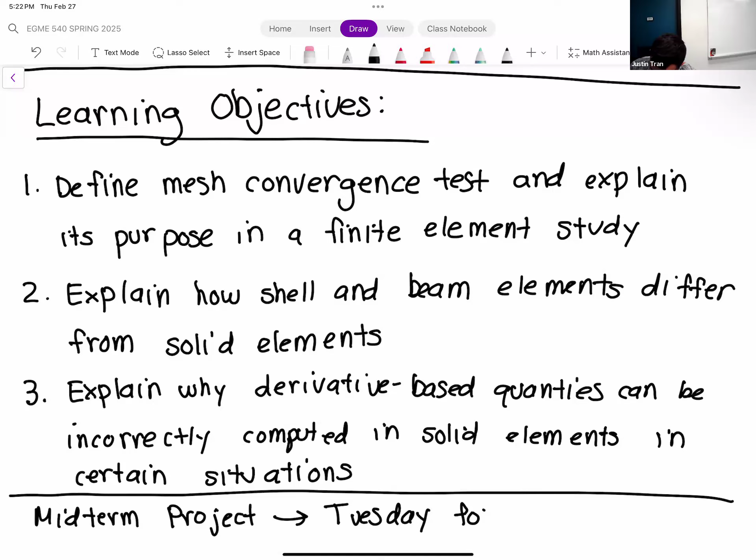Are you good? Are you done? Oh, good, thank you. I was supposed to drive my friend to the airport. He showed up at my house, and at 7 o'clock he called me like, oh my God, I gotta take you. But I did not go to sleep at a time last night that was conducive to taking your friend to the airport at 7 o'clock.

Where? Ontario. Okay, I live pretty close to Ontario, so.

Yeah, I was trying to get it done by today, but things came up yesterday. I'll get it done, and Tuesday we'll talk about it. It's not due Tuesday, so we'll talk about it Tuesday. I pushed the due date back over the weekend.

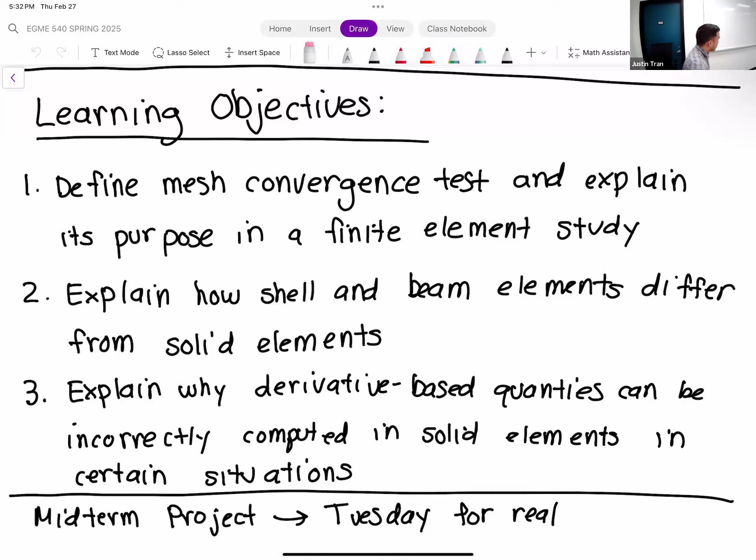All right, any questions I can answer before we get started for today? Okay, good. All right, so let's go ahead and get started. We're going to start today with the discussion of the mesh convergence test.

So we spent the last couple of weeks talking all about the different elements, right? Going over the pros and cons of the different shapes—tetrahedrons, hexahedrons, triangles, quadrilaterals—looking at differences in their shape functions, as well as linear and quadratic. All that is really good, but ultimately all of this background information leads to: what is the best kind of mesh? What is the best mesh we can use to get the best results?

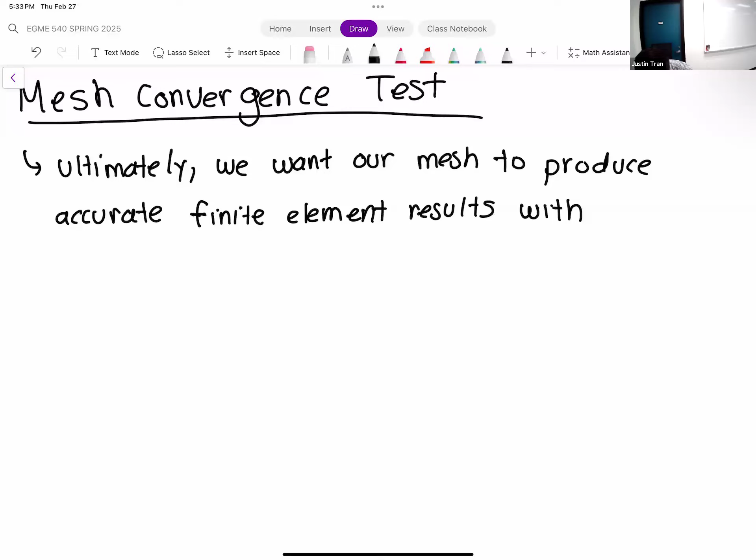So basically, you want to refine your elements enough, use just enough element order for your results to be accurate and reliable. You can go more than this, of course, but then you use excess elements and you're taking up extra resources, which in the finite element world is usually not the end of the world, but you want to reduce that if you can.

Okay, so let's remind ourselves briefly of all the levers we have to turn, or the different ways that we can tune our mesh to get these accurate results.

So most of the ways that we can tune our mesh have to do with changing our element settings—the element shape and order. We spent a great deal of time talking about those two factors and how they affect our results. But most importantly is the element size. All three of these factors contribute to how accurate your results are going to be and how costly or time-consuming the simulation is going to take.

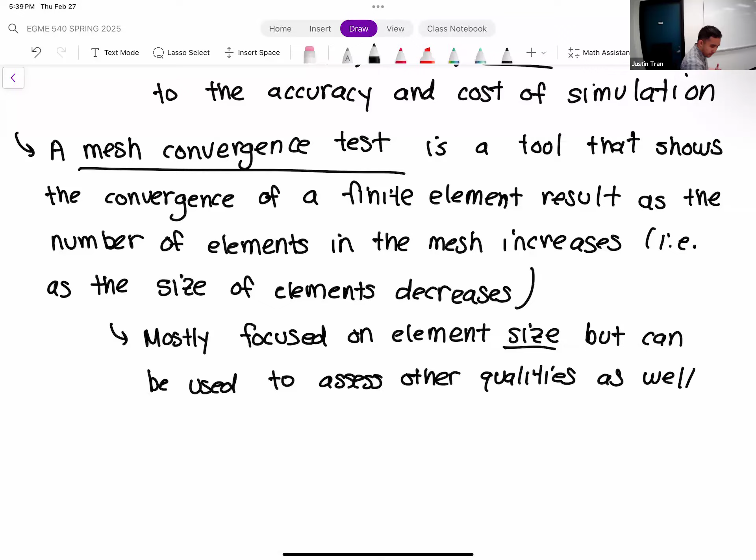Okay, so to show you a mesh convergence test, I think the easiest way is just to show you what it typically is. A mesh convergence test is typically shown as a line graph. So usually what you're going to see is a graph that looks like this.

This is something that's almost always presented in a lot of finite element studies. Maybe not the graph, but usually it's mentioned somewhere that a mesh convergence test was performed. On the horizontal axis of this graph, typically what's shown is the number of elements in the mesh.

And then on the vertical axis, you have some result - stress, strain, or deformation, something like that. So the vertical axis is some result of interest.

So typically for a mesh convergence test, in order to run it and show this, you need to run multiple simulations on the same object with the same boundary conditions. So the data points on the mesh convergence test are produced by running the same simulation, but successively refining the mesh.

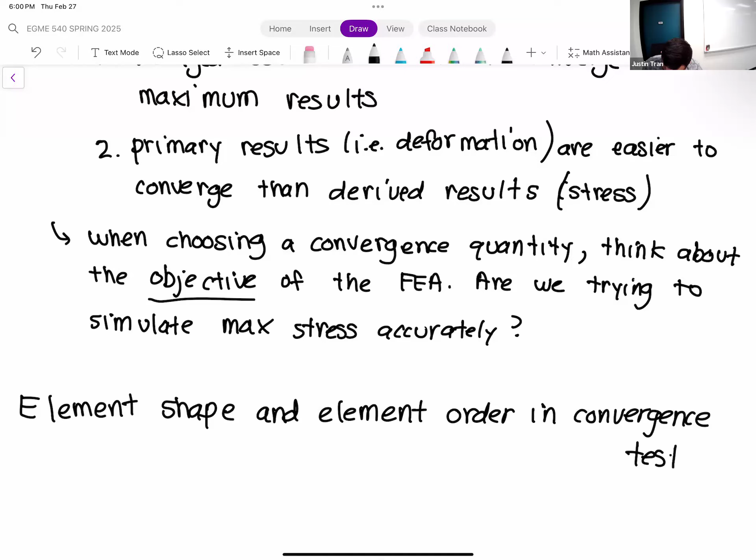Because those are going to affect the convergence as well, since we've already discussed that those things affect the accuracy of your finite element simulation. We've mostly just been discussing one axis of mesh change, which is just the element size, but really there are multiple axes. So how are you going to factor in those element orders and shapes? Well, the way that's typically displayed in practice is that you show multiple mesh convergence tests for different meshing techniques.

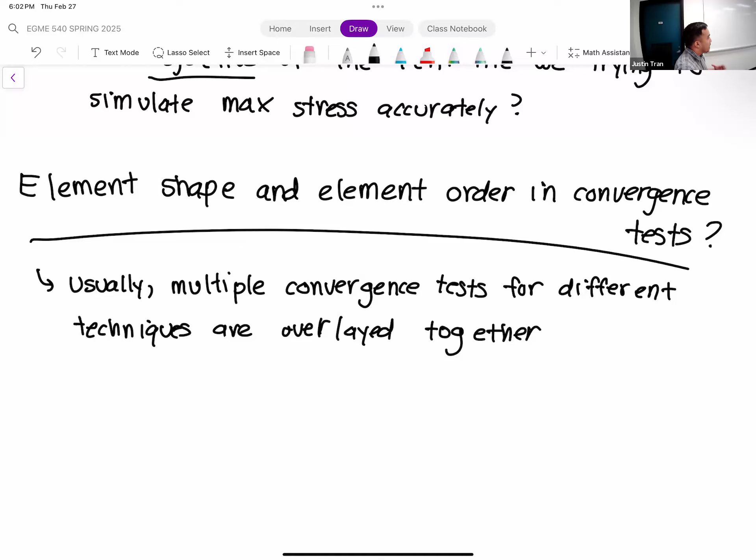So if you want to make a comparison between linear elements and quadratic elements for your finite element mesh, usually you're going to show the mesh convergence studies for both of those on the same plot. And usually what should happen is that your quadratic element should converge faster than your linear.

For example, let's say we did a mesh convergence test. Down here will be number of elements, and on the vertical axis, let's say we're converging on average stress. Let's say you ran the simulation with linear elements. So with linear elements, maybe your convergence plot looks something like this. You do reach convergence, so you can see that we've converged, but maybe you do so with a high number of elements or a fairly small mesh size. If we do the same test, keeping boundary conditions and everything else the same, but reran it with quadratic elements, your convergence plot may look something like this.

So here we've used the mesh convergence plot to show a comparison between linear and quadratic. This is typically what you should see: with quadratic elements, you should converge faster. In other words, you can get numerically accurate results, or minimize numerical errors, with fewer quadratic elements than you can with linear elements.

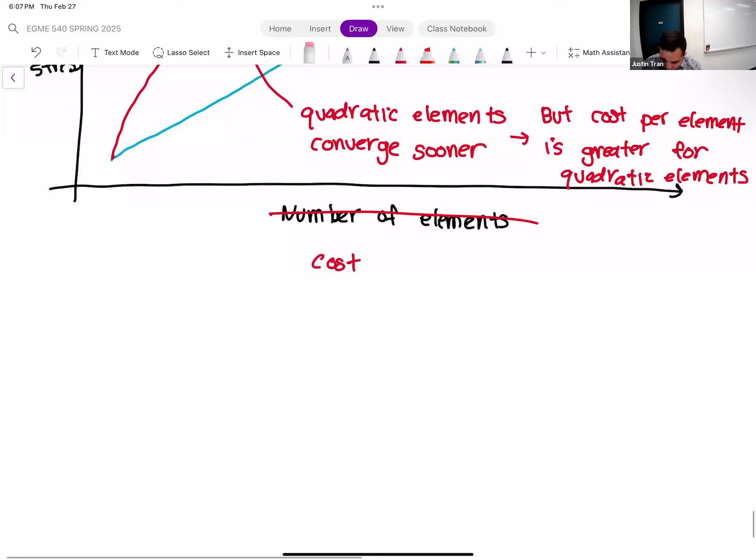Okay, good. Actually, speaking of that, another way you might see these mesh convergence tests displayed, instead of number of elements, is as the element size.

I don't particularly like this form of the mesh convergence plot because you kind of have to read it backwards. Generally, mathematically in other math classes, when you see convergence, it usually goes to the right. But with element size, you have to look at it in reverse, because you're converging as the element size gets smaller. So it usually looks something like this—even weird for me to draw with my right hand. With element size, you get convergence to the left, okay, which there's nothing wrong with. It shows you the exact same information, it's just that for me it's kind of weird to read it this way.

Certain people, certain papers will prefer this format. So if you're looking in the literature at finite element studies and the mesh convergence plot seems backwards, look and see what's on the horizontal axis—oftentimes they'll use element size. But personally, I prefer the other way. If you guys in your reports and projects do it this way, I'm not going to mark you down. I have my preference, but this is equally as valid, so do whatever feels more comfortable to you.

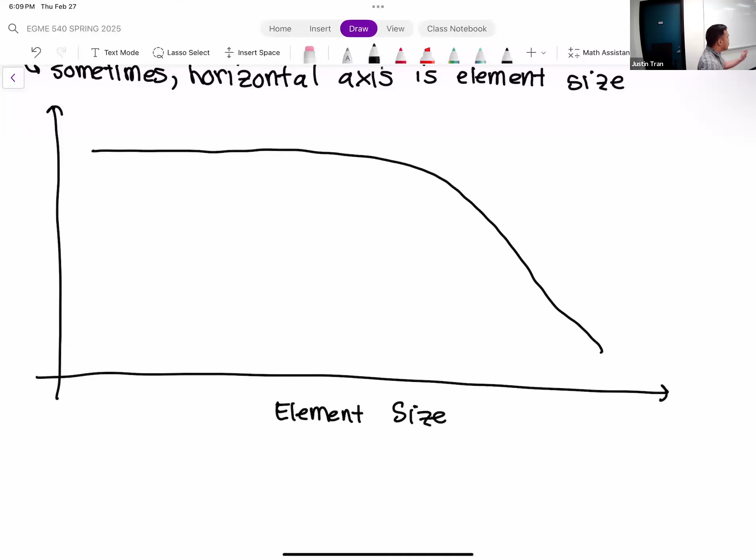I think people like this one because the element size is something you directly input. When specifying your mesh, the element size is what you directly put into ANSYS itself—you don't really have direct control over the number of elements, that just kind of results based on the size of the elements you choose. So element size is a more direct input: I put this size, and this is the result. Anyway, that's what I think the logic is.

Okay, all right, so that's mesh convergence tests, a very important part of specifying your mesh settings, and kind of a core thing that we're going to do.

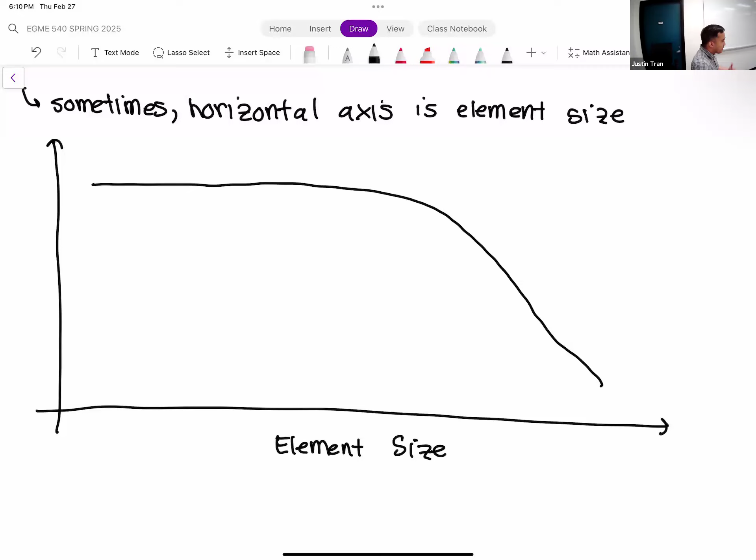All right, so for the rest of class today, we're going to start to talk about some of the more specialized features within ANSYS—features and things that you may not use in every single simulation, but can be very useful in certain situations. Keeping on this theme of meshing and elements, we're going to talk first about some specialized element types called shell and beam.

So in a nutshell, shell and beam elements are specialized element types within ANSYS that you can use for certain situations for more accurate results.

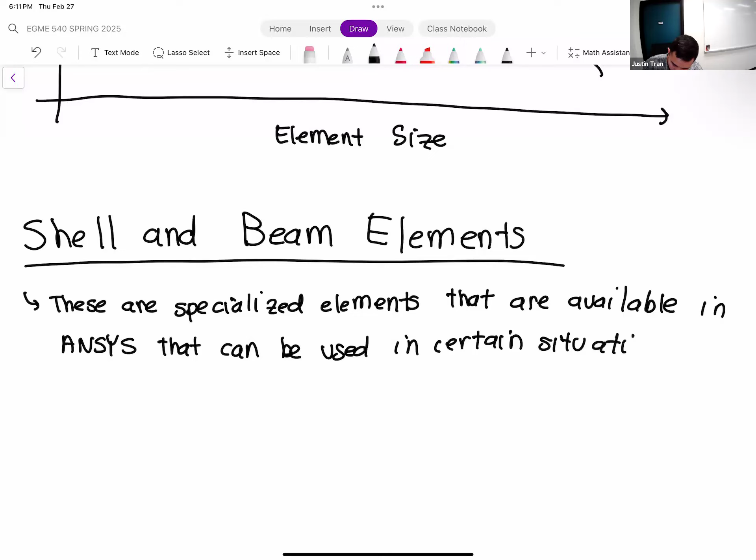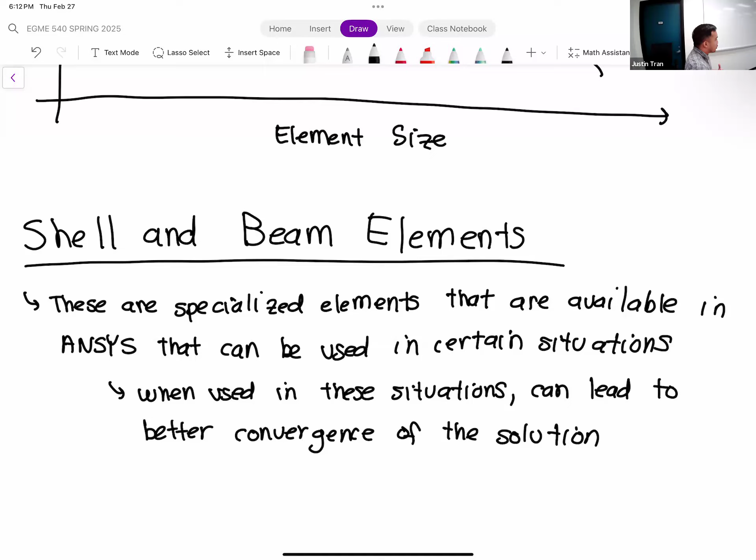We're going to talk about the situations where you would want to use shell and beam elements, as well as their benefits. The main benefit is that for these situations, they often lead to much better convergence of the solution. You're going to have much faster convergence with a smaller number of elements using these special element types.

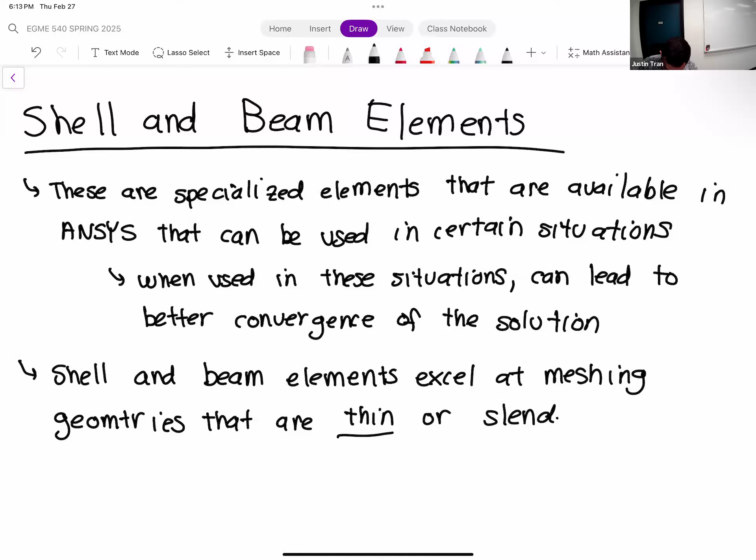So what are the situations where you would want to use shell and beam elements? You want to use these elements when your geometry exhibits certain features. In particular, shell and beam elements excel in meshing geometries that are thin or slender. The more exact definition is when you have a geometry where at least one dimension is much smaller than the others, that's usually a good indication you want to use shell or beam.

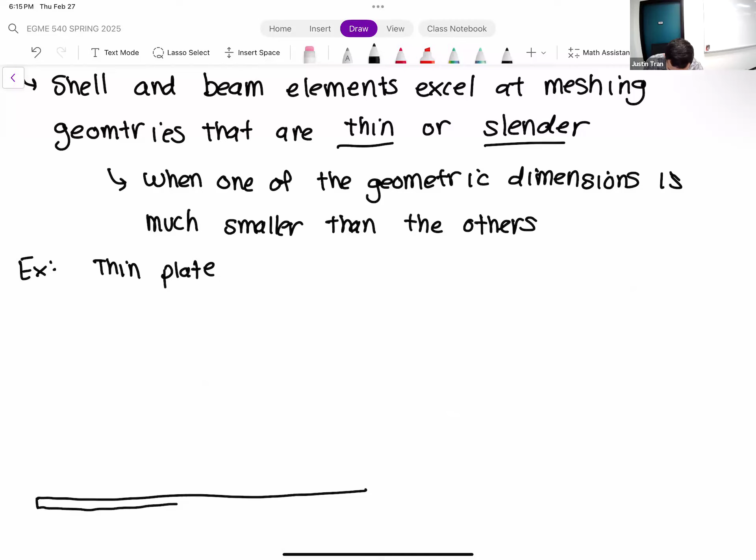Let me give you a couple examples. The most quintessential example for shell elements are very thin plate-like geometries. Geometry that may look something like this - very long in 2 dimensions, but very small in the other.

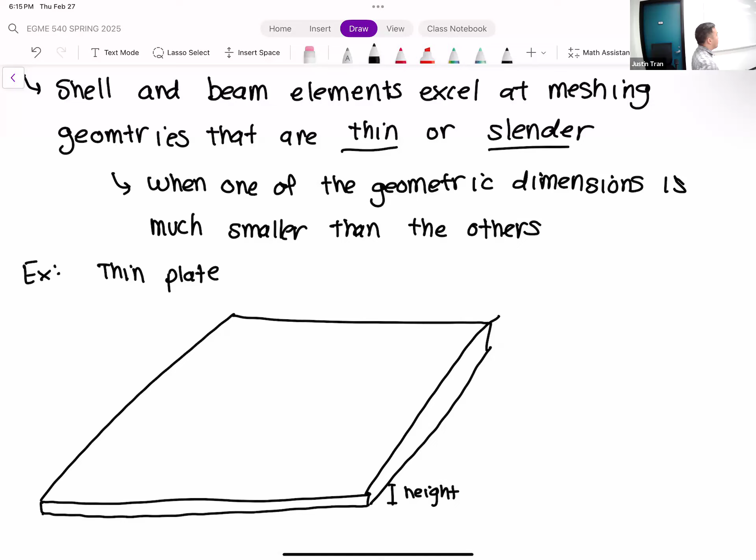The plate's supposed to have a uniform thickness, just ignore my poor drawings. In this case, the height of the plate is much smaller than the length and the width of the plate. So this would be a great chance to use shell elements.

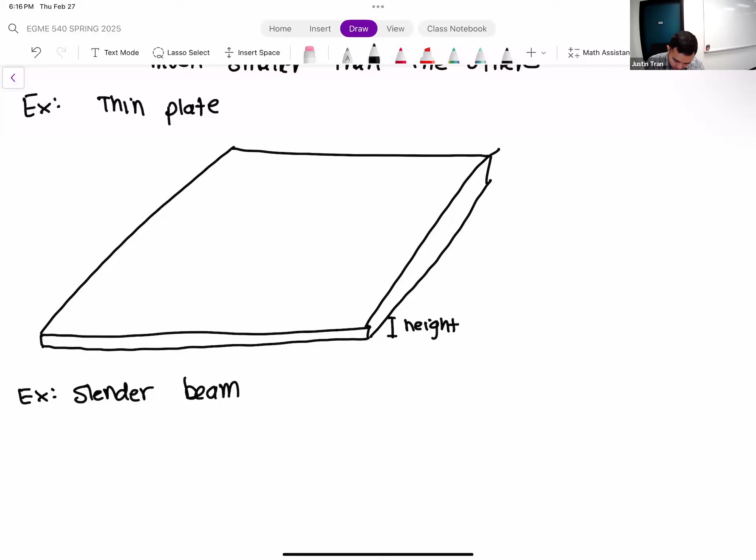This is also the quintessential situation to use a beam element for a beam-like geometry. Let's say that you have a geometry with a square cross section, very, very long like this. That would be the perfect opportunity to replace this with a beam.

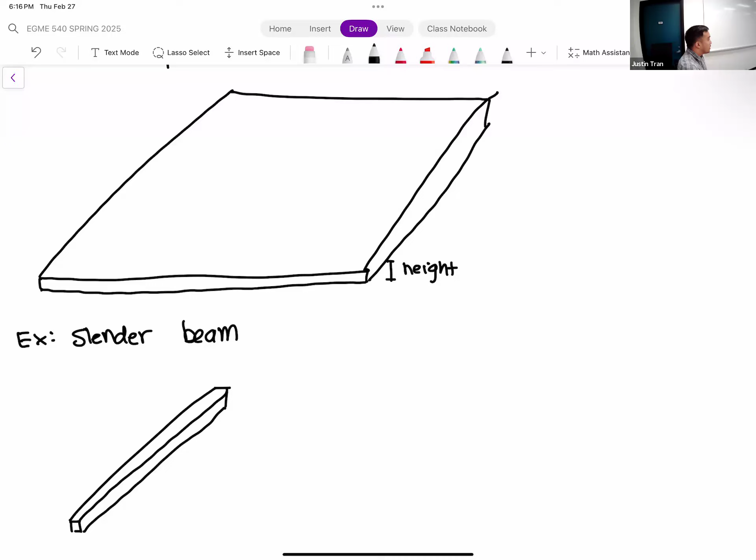If you notice from these two examples, these are objects that are technically three-dimensional, right? They should be three-dimensional, despite how I drew them. But for most cases, if you were to analyze this in practice, you would consider them either a 2D or 1D scenario. This thin plate is essentially a 2D scenario, where this slender beam is essentially a 1D scenario - at least intuitively, we think of it that way.

And so it makes sense to use elements that match up with the geometry. Instead of using a fully three-dimensional element, we should use two-dimensional elements for thin plates. Instead of fully three-dimensional hexahedrons or tetrahedrons for a slender beam, what if we replace it with one-dimensional elements? That's going to save us a lot of cost, and it's going to save us a lot of headaches with convergence.

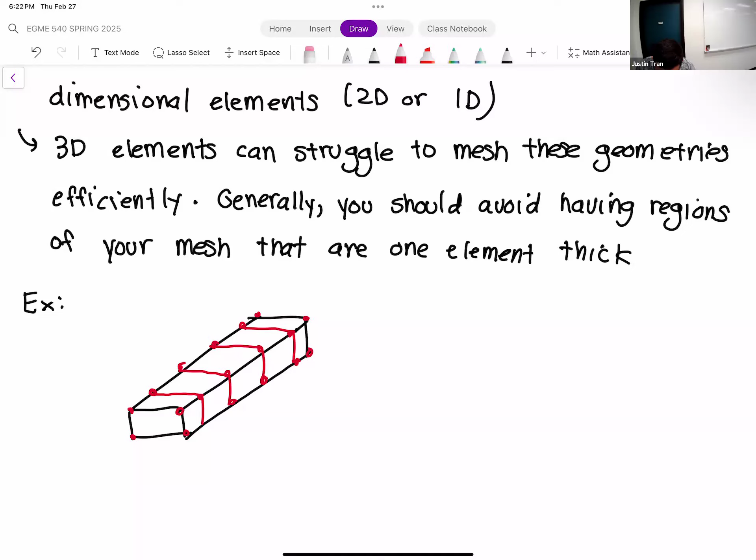All right, so this would be a situation where we only have one element through the thickness. If we travel from the top of this structure to the bottom, from point A to point B, we only cross through one element.

That's what I mean when your geometry or your mesh is only one element thick. Now this is challenging because there are no interior nodes, and so all the nodes for these meshes exist on the boundaries of that geometry. For these types of geometries, and for finite elements in general, you always want to have a healthy amount of interior nodes.

You want a healthy amount of interior nodes when you are computing your solution. And when your geometry is just one element thick, you virtually have no interior nodes.

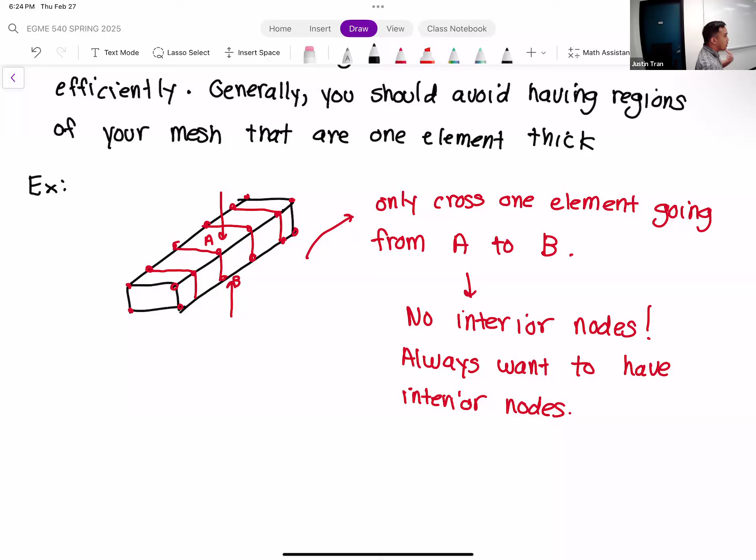The reason you want interior nodes is that a lot of your quantities are computed based on derivatives. I'm not just talking about the stresses and strains of your results, but even in solving the differential equations, the governing equations of the FEA, you're going to have to take derivatives of quantities at some point as well.

If you only have exterior nodes in your simulation, then you're basically not getting any information from the interior of your geometry. And a lot of times, especially for structural simulations, you need that information from the interior in order to correctly compute things like deformations and stress.

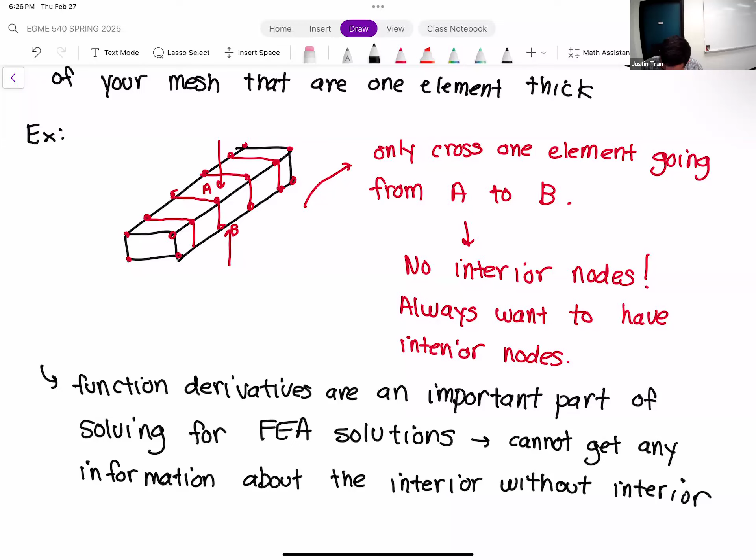So if you're going to be meshing these geometries with solid elements, hexahedrons or tetrahedrons, you want to make sure there is some indication, at least from the outside—it's very hard to look at your mesh from the inside, I do it, but at least from the outside there should be some indication that you do have interior nodes in the geometry if you want an accurate result.

Another reason interior nodes are important is because interior nodes are not acted upon directly by the boundary conditions.

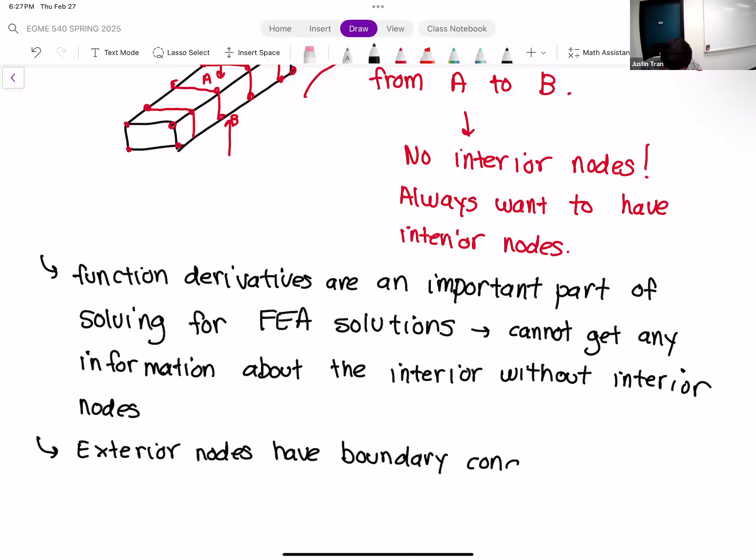Every single exterior node in a finite element simulation has some boundary condition applied to it. Now, granted, most of these boundary conditions are the zero stress boundary conditions we talked about before, which have a very minimal or negligible effect on the solution. But there are a lot of exterior nodes where you have forces or constraints applied, and those are going to strongly affect the solution and behavior as well.

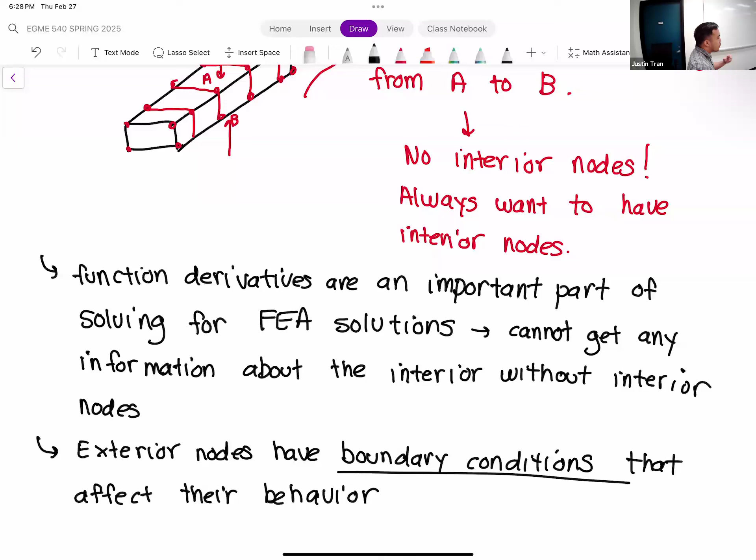You don't want those boundary conditions to be the sole determinant of things like stress and deformation in those areas. So having interior nodes hedges against situations where you don't have accurate behavior that's not just directly specified by the boundary conditions.

Because if you don't have enough interior nodes, you run the risk of your result being directly specified—you're directly specifying what the solution is, and you're not letting it come about naturally from solving these equations.

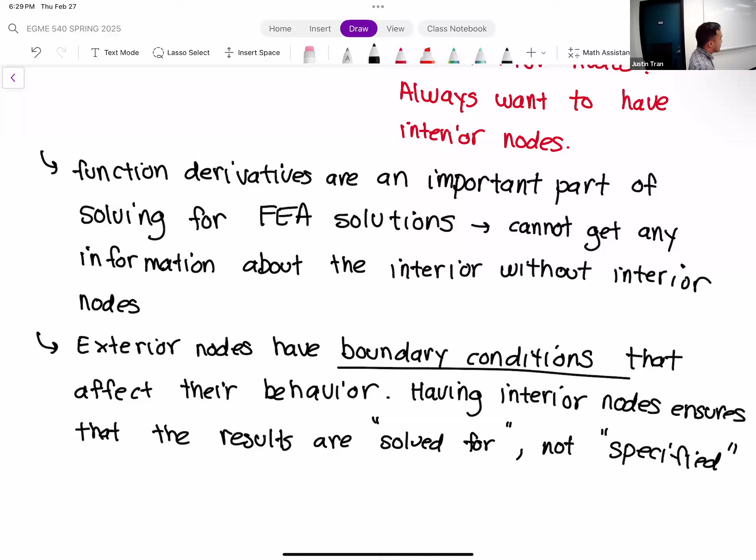There are other reasons too, especially in other domains like fluid mechanics. You want to have interior nodes there as well. Without interior nodes, you are not going to get a solution at all, because everything is just going to be a no slip boundary condition. There are other reasons, but I'd say these are the most important.

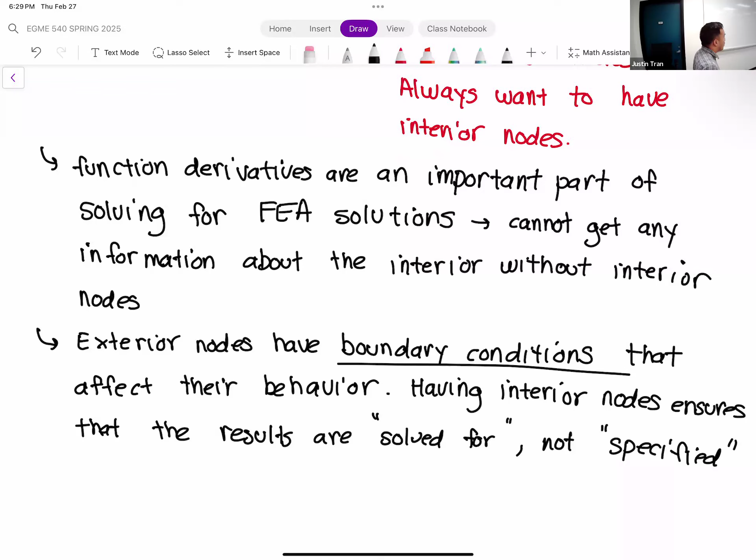All right, any questions on this so far?

So when you have a thin or slender geometry, it can often be a struggle to get interior nodes using solid elements without exponentially raising the cost.

I should define this—I've been saying it the whole time. When I say solid elements, I mean our traditional elements that we've talked about before: things like tetrahedrons or hexahedrons. These are our 3D elements. I apologize, I've been using that term all day today without properly defining it.

So the challenge with using solid elements in these thin and slender geometries is that you often need to put an inordinate amount of elements in order to get a proper amount of interior nodes.

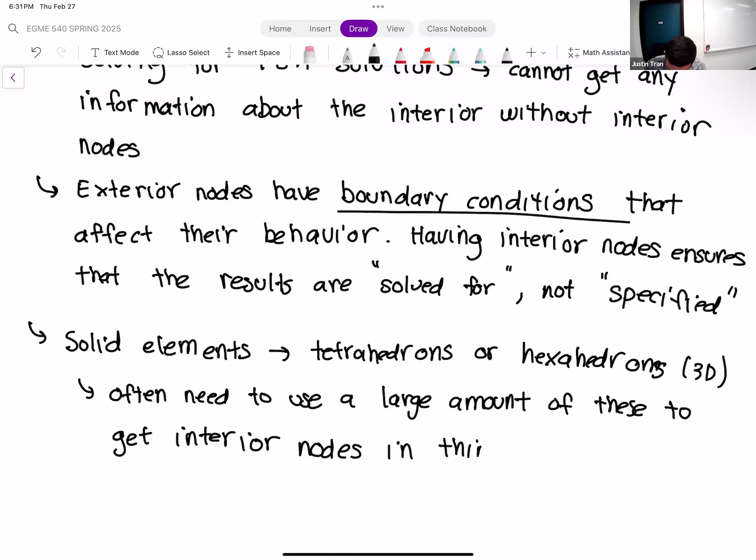Oftentimes you end up with the mesh for just a very simple plate, you may get a mesh that is 2-3 million elements, which kind of seems like overkill.

The challenge is that when you specify a mesh size for solid elements, that mesh size is applied for every edge of that element itself. It's very hard to intentionally create skewed elements. Let me show you an example with hexahedrons.

Let's say we have a very thin plate. I'm going to blow it up for a second to illustrate. Let's say we want to mesh this so that we get at least 3 elements through the thickness. 3 elements is pretty reasonable. So to get 3 elements, we have to split this in 3 - 1, 2, 3. Our elements need to be at least this size.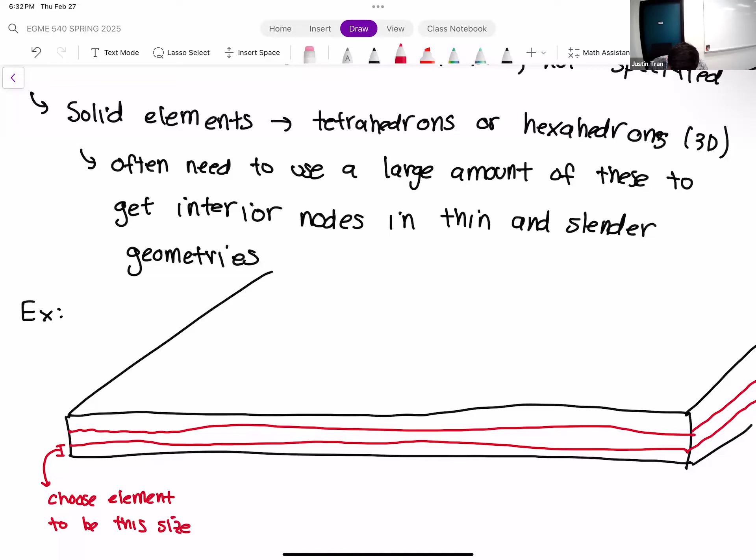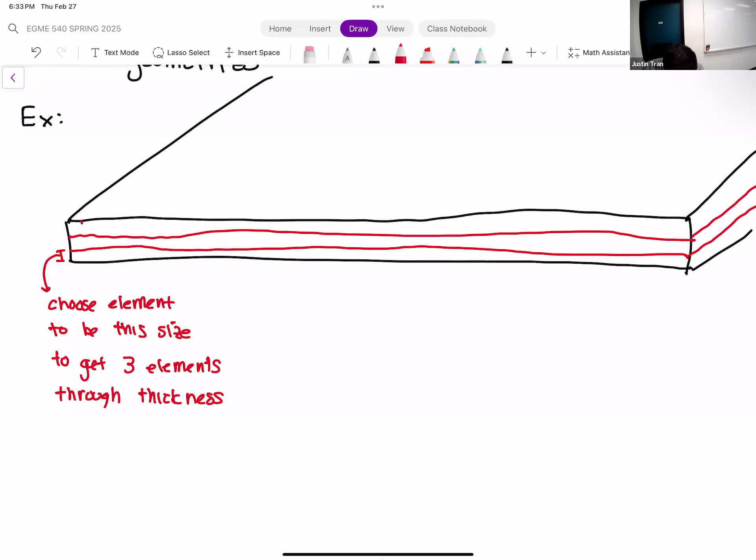So the size of the elements we choose has to be this size, maybe 2 millimeters or something like that. The problem is that when you apply that size, it applies that size to every side of the element, because elements generally like to be equal - they like to have the same length of edge on every single side. So if you choose an element of that size, you end up with a mesh that may look like this.

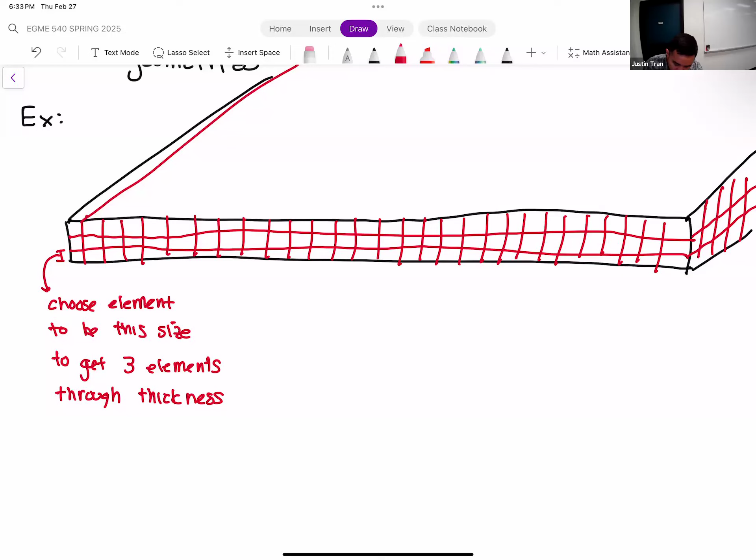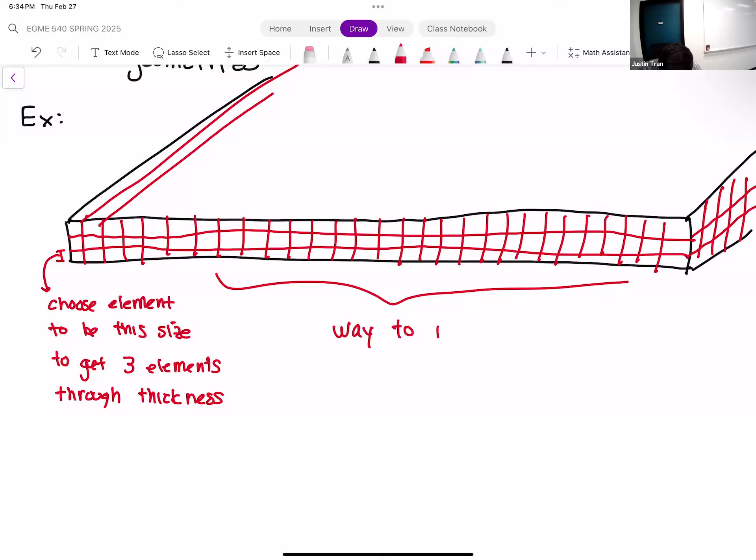I'm not going to draw all of them, but you get it. This creates an unnecessarily large number of elements just to satisfy that thickness criteria. The number of elements is too high for this simple geometry.

Now the question is always asked, why don't we just skew the elements? Why don't we make them really small in one dimension but stretch them out in the other dimension. There are ways to do that, so it's not impossible. It's just that at that point you run the risk of intentionally skewing your elements, which can lead to adverse outcomes for your results as well.

There are some situations where you'd want to do that. I'm not going to say that's a terrible decision a lot of the time, but it's usually not one you're making unless you really know what you're doing - especially when there's a much easier way to deal with this by just switching to shell elements.

So the proper, or most elegant way to deal with this, is to switch the element types. Instead of trying to force 3-dimensional elements into this very thin geometry, what if we just treat the geometry as if it were 2D and mesh it with appropriate 2D elements?

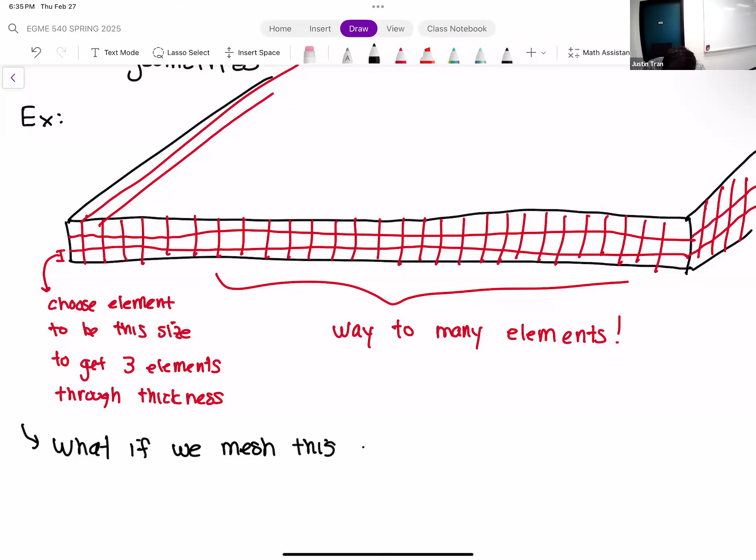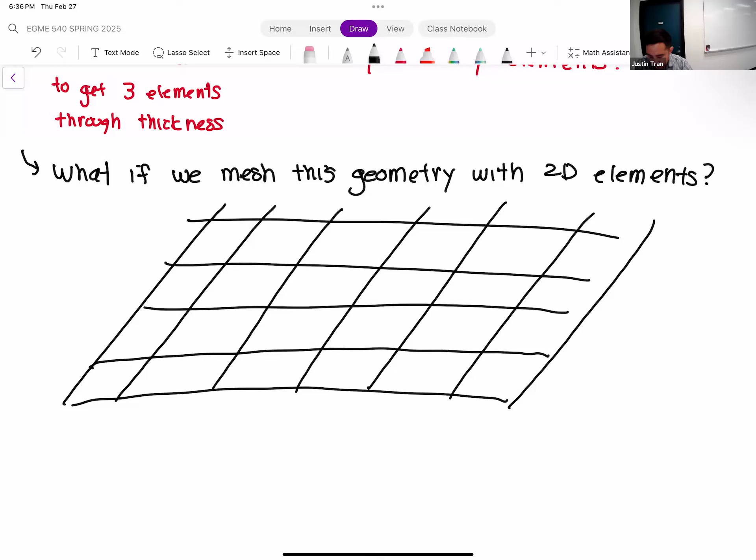Instead of trying to jam so many hexahedrons in there, what if we just do a very thin plate like this? Then there's no requirement on the thickness, because we're assuming the thickness is essentially infinitesimally small. So then we're free to mesh it something like this, which is much more reasonable. This looks a lot more natural in terms of what you would expect for something like this.

A 2D flat element is kind of its natural shape, so it should make sense to use an element of that same stature.

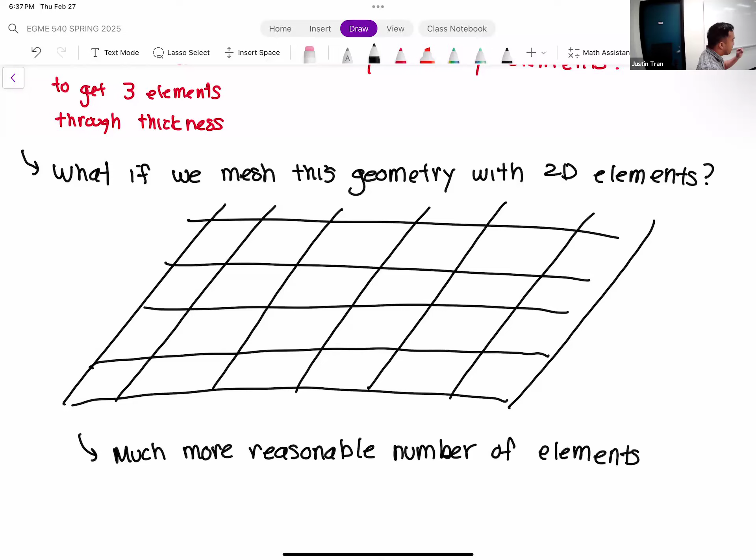But you may be thinking, wait a minute, the whole reason we're in this issue is that we can't put enough elements through the thickness - doesn't this violate that exact thing? Because technically this thing has no thickness, so we just have one element through that thickness. And you're right - by eliminating that third dimension, we are eliminating the thickness. But shell elements are not just traditional 2D elements. They have a little bit extra to them.

A traditional 2D element would only compute X and Y deformations at each of the nodes, exactly like we did in activity 1. Shell elements are a little bit special because they actually compute extra degrees of freedom at every node. So even though they're 2D elements, we're using 2D elements in a 3-dimensional space, in a 3-dimensional application, and that means we have to compute extra degrees of freedom.

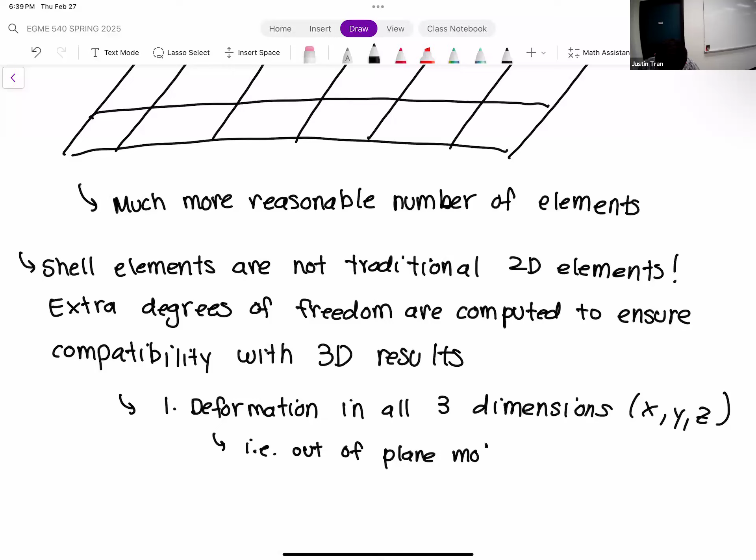So that means with this shell element, we can actually get out-of-plane motion, which is kind of cool. Looks pretty cool when you see it—it's like you have this piece of paper in your finite element simulation doing like a gymnastics move or something.

But the other thing that computes, that's really unique to shell and beam elements, is they compute something called rotations as well. And rotations also have 3 dimensions, X, Y, and Z.

Traditionally in solid element FEA, only the nodal deformations are computed. Then based on those nodal deformations and the relative positions of those relative to the elements, the orientations are known. What's different about shell elements is that the orientation, or direction, of the shell structure is actually directly computed as part of the solution as well. So when I say rotations, I mean the element orientation itself is computed.

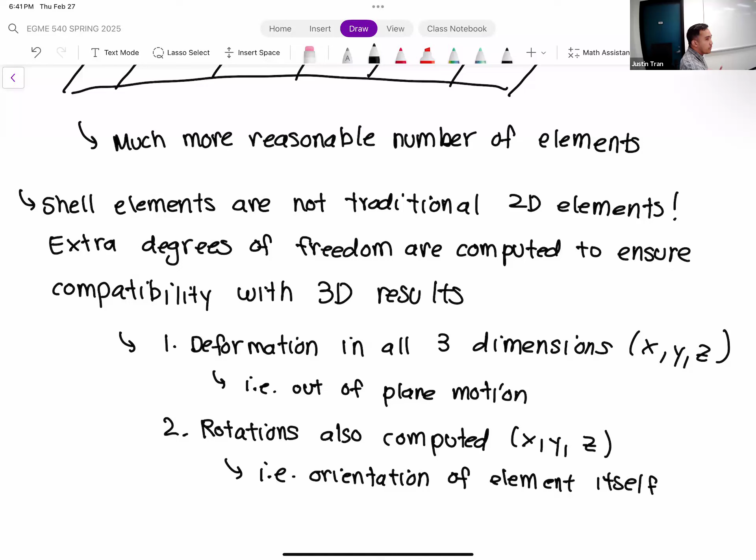It's very interesting—you would directly compute that. And if your element distorts, so one side has one orientation and the other side is different, you can directly compute that in the shell elements. Whereas in solid elements, those would be derived implicitly based on your deformation solution.

Because of these extra degrees of freedom, it actually gets around the difficulty of computing things without interior nodes. Those extra degrees of freedom are... all right, any questions on this?

Okay, one last thing before we head out for today. When you have a shell structure like this, it's going to be infinitesimally thin, so there's no actual thickness there. But the thickness information of the original structure is not lost, right? Because in reality you're using the shell element to model a three-dimensional structure—you're not in Paper Mario or something. So the thickness information is not lost, it's still stored.